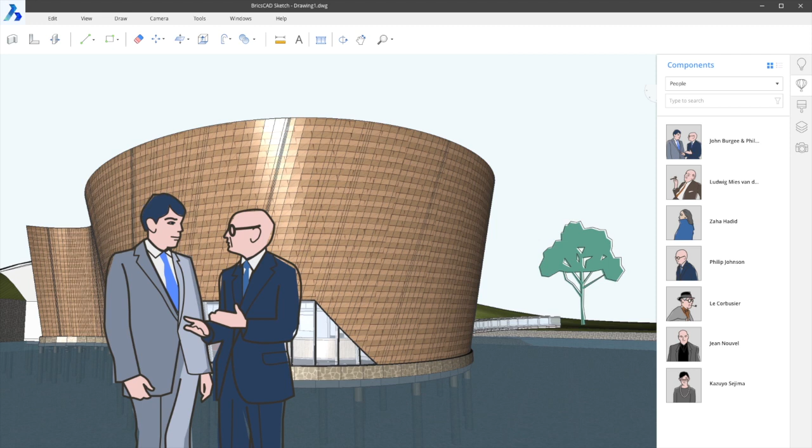But somebody before me, way more famous than I am, always ended these presentations with, there's just one more thing. And, well, we have just one more thing. I'm really, really happy to announce a new product that we're going to launch.

Our point is that we have to address the need of starting simple. I heard Michael Nordval saying that in architecture, it's really about the architecture first. And what you need is really simple tools, easy to use, to set up that conceptual design. I mean, play with it. It must be fun to do. I said it this morning already, if you have to be a specialist on the software, that's wrong. The software should be that easy that you can stay an architect or an engineer. And we think we have that initial product to fulfill that wish, that requirement.

And we call it Shape. BricsCAD Shape, you can call it Shape, whatever. It is about the GUI where nothing is missing, but as important, nothing too much as well. It's really made modeling simple, intuitive, from the point of view of managing your layers. I mean, you can read all these things. That is what it's all about. Make it easy, make it very, very intuitive, in a user-friendly interface.

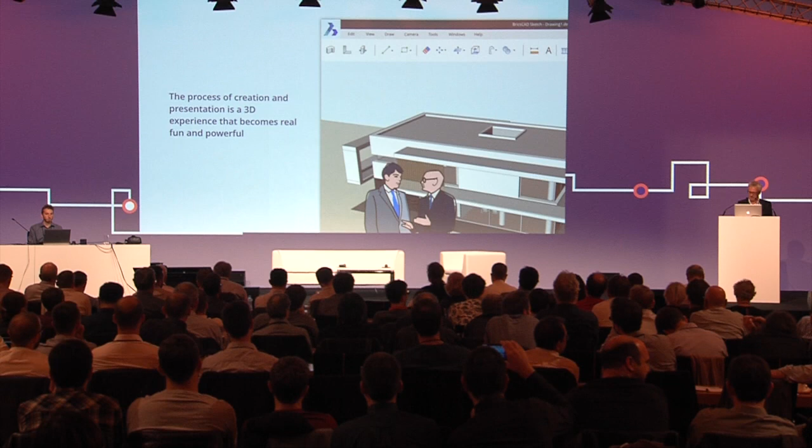So it's 100% DWG. It's 100% fitting in our philosophy. And the most thing probably for the market is that it's free of charge, and it doesn't require any training. So we're going to spread that massively in the industry.

And all models that you make with Shape, you just open it with the full BricsCAD BIM and you BIM. So I think we are bringing BIM to millions of AEC users in the DWG space. So that's the real start for them. They don't have to pay for it. They play with it. I'm almost sure that they're going to like it. And then we talk and see if they move on.

It will be available, I hope, end of 2017. But to be sure, absolutely sure, we have written down early 2018. But we can't wait to show it to you. So guys, show it.

Thanks, Eric. All right, we've been talking about future technologies, so as Eric mentioned, this is the near-term future of modeling. It's a very simplified interface and experience so that you have the tools, the features, everything at your fingertips so that you can explore your design ideas creatively.

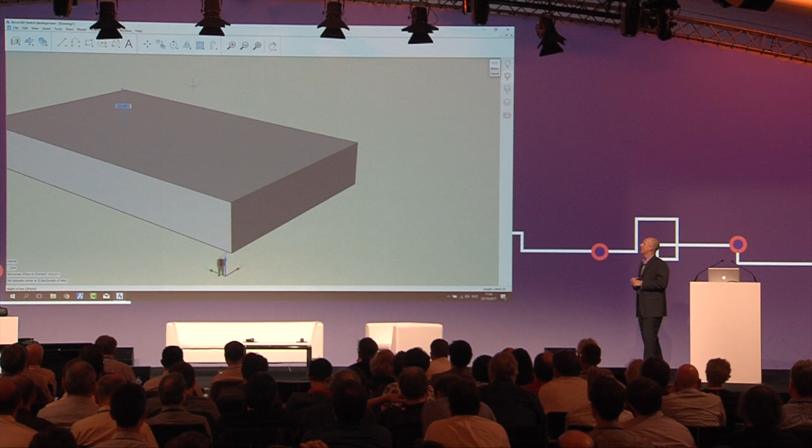So we can take this geometry and we can start to manipulate it and work with it. You saw the manipulator earlier, so we could take that, we could change the slope of that surface, say 10 degrees initially.

And if you remember, the whole concept was about folded screens. So we'll grab the surface on the back side, on the rear side of this building, we'll add a slope to that, and then we'll also do the same thing on the roof of it.

So within 3 moves, we're starting to shape the form. But as we look at the front, it's too steep, so we want to add some more slope to that. We can just grab it again. The manipulator's right there, and we can reset the angle to what we want.

All right, now we can grab that side boundary, and we can offset it to create a default depth for the roof, the walls, and the floor.

And so then using that boundary, we can push it through to hollow things out and create a shape there. And then what we can do to create the walls and the roof, we can use slice that we access from the quad. We can do that on the undersurface of the roof, and we can also do that on the top surface of the floor. And so then we've got the walls, the roof, and the floor.

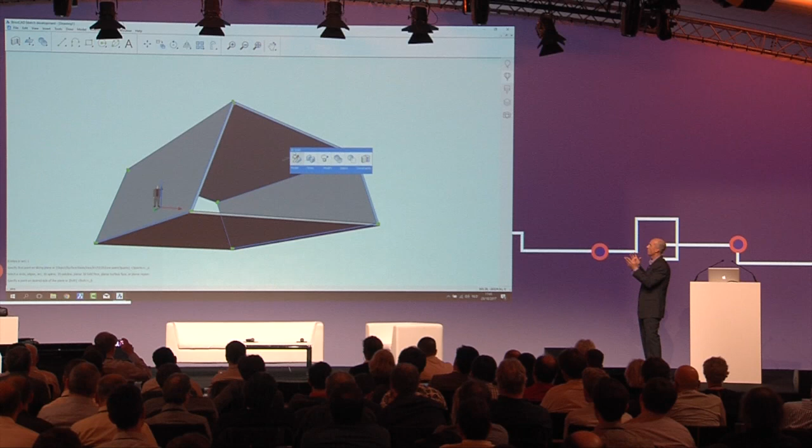And now, the whole tower design was about natural ventilation, but this is a little bit too much. So we'll look at adding some sidewalls here really quickly. We can grab the boundary of that, extrude it towards us, and create the wall.

And then we can just grab a surface of that wall, use BIM drag, and carry it across to the other side. So pretty quickly, we're starting to build things up, explore our design ideas.

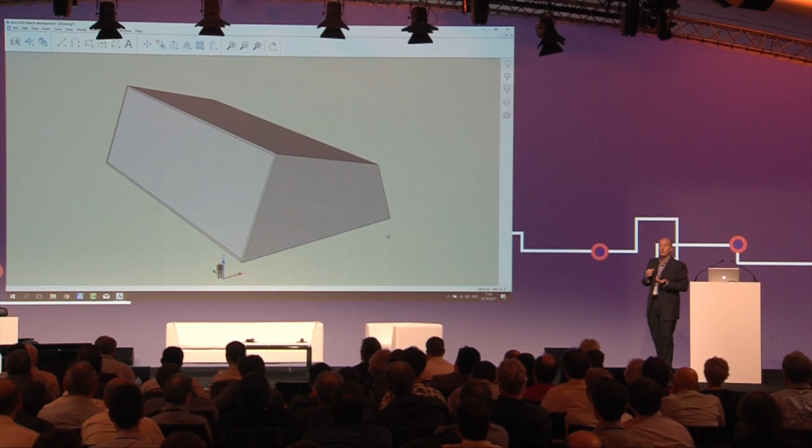We can then start to look at creating an opening for that entry into the yoga studio. So we could create just a shape rectangle here. And then we can grab that, and we can push it through not only the wall, but we can push it through the floor and the sloped wall as well to create that void.

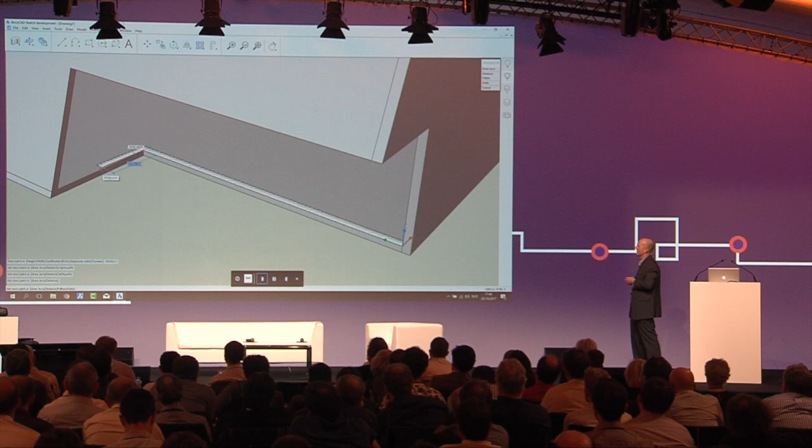And then we can zoom in a bit, and we can draw some polysolids to create an enclosure. We'll quickly place those, and we can select the undersurface to set the height.

Now, we didn't draw it all the way to the edge of the sloped wall because we can just highlight the surface, access connect to nearest, and then it'll connect it to that sloped wall.

Then we can grab the boundary that's created by the floor, and we can use that to drag it out to create the landing for the entry area.

So then we can hide the roof, and we can start to create a view looking inside.

Now let's create the second floor. And we can do that by using connect to shift the connection of the walls so we can get the surface that we want.

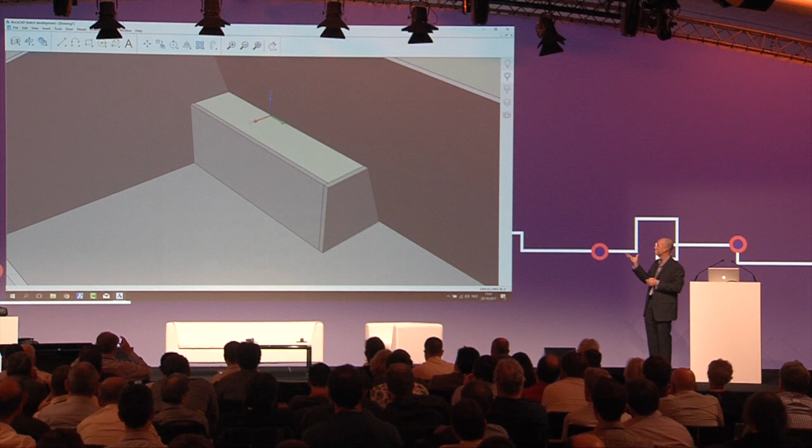I'll highlight that top surface, extrude it up to create the depth for a floor. And then we'll use push-pull to pull it out. And then we'll use connect to nearest.

That'll connect it to that sloped wall in the back. We can use connect to nearest on the other side to connect to the side, and again, to the front. So pretty quickly, we have this floor that's connected to these sloped walls.

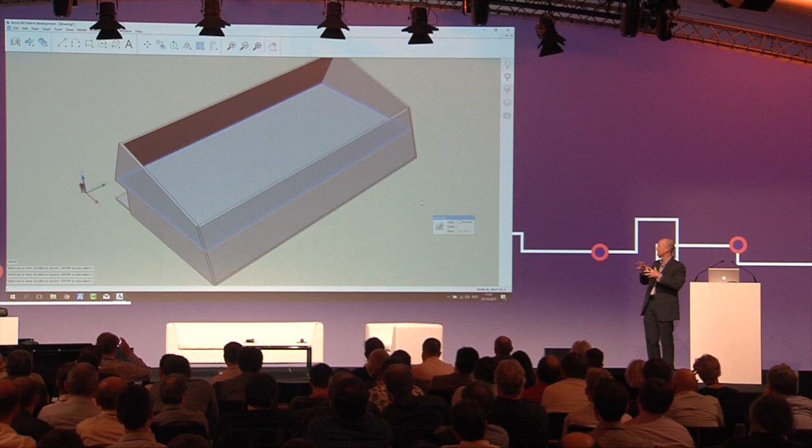Now we can unhide that, and we can hide the surface of this end wall. And it creates a boundary on the other end. So we can use that to grab that, use BIM drag, and then pull it to create an interior wall.

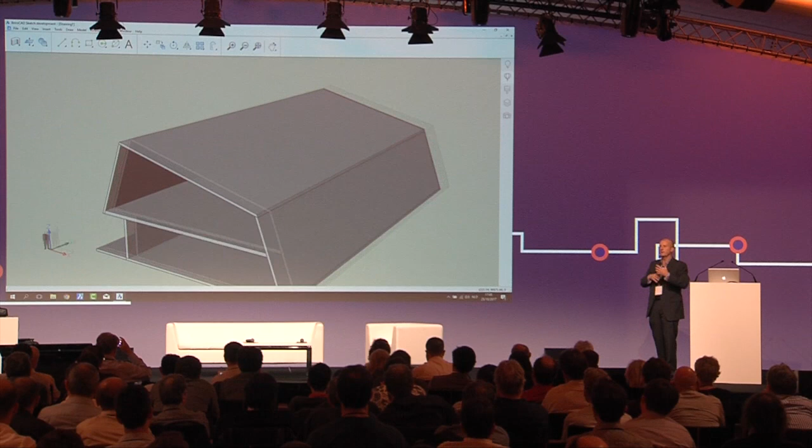As you start to use Shape more, you'll realize that you can use boundaries in lots and lots of interesting ways. So now we can get that boundary surface on the front wall and push it through to create a void opening for a rough space. And again, we're just trying to get some design ideas down.

And now we can start to create the exo structure that's a key part of this yoga studio. So we can select that boundary, select an offset, start to create that. Then we can take that polyline and we can push it out to create a surface.

That's the depth of the frame, the structural frame. And then we can highlight that overall surface, use thicken, and we can create the overall 3D structure element.

And then we can make a copy of that because this is actually a prefab assembly unit, and so we have two frames that are in close proximity that are connected to each other.

And now we can isolate these two structural frames, and we can start to create the secondary structure members that are spanning between those frames.

So we can get the surface to set the UCS that we want, and then we can draw a profile for a beam that we can push through and create an initial structural member.

Then we can grab that surface, use BIM drag, and start to make a copy of it, and then we can make a number of copies of it.

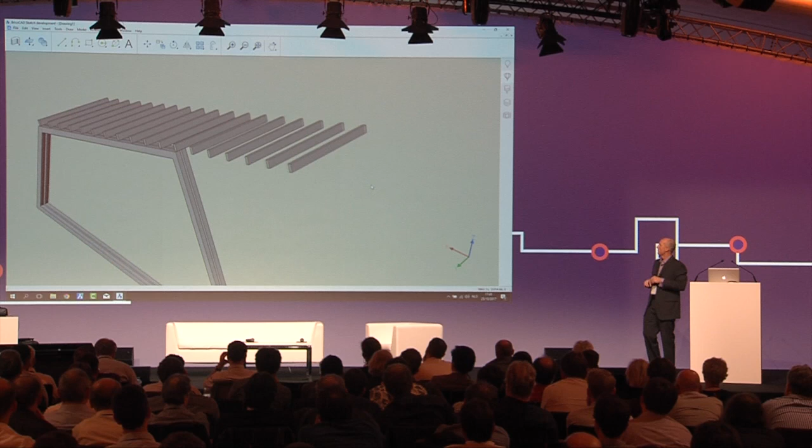Now, it may seem at the end of the day that Jacob's going a bit over the top here, but part of the design intent is that we're able to fold these members down to that structural frame. So again, we can use our friend the manipulator and set the angle for that and turn them down to the face of the structural member.

And we can do a similar approach on the back. We can create copies of those, bring them to the edge of that truss or that frame, and then we can grab those. And again, using the manipulator, we can turn them down.

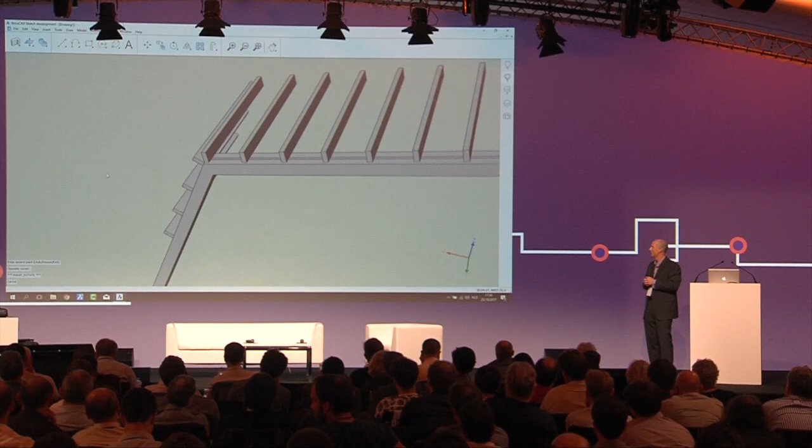And what we can do is we can create an intermediate member here by just grabbing that boundary that's created from between, you have the two beams and you have the boundary, so we could grab that, and then we can create a copy, and we can carry that forward across.

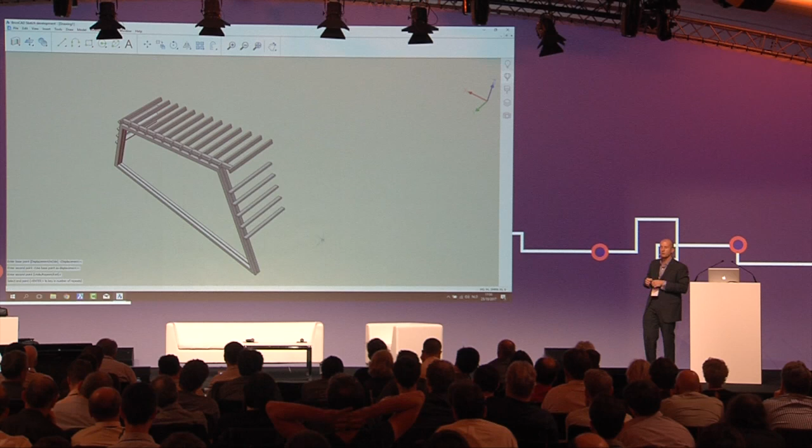And so we can actually have a structural member reaching out to that one that was just floating out in space.

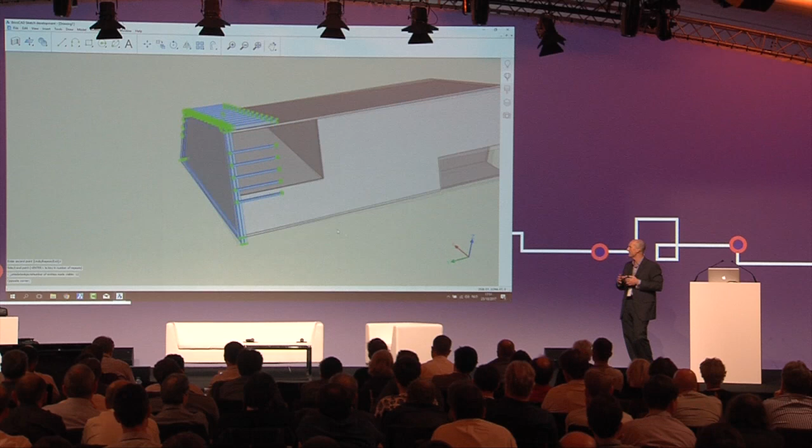And so now we've got the main structural members in that bay, in our structural module. So then we can grab that whole set, we can create a copy of it, and then repeat copy to go across the whole width of the yoga studio.

Now we need to finish off the two frames at the end, so we can just make a copy of those.

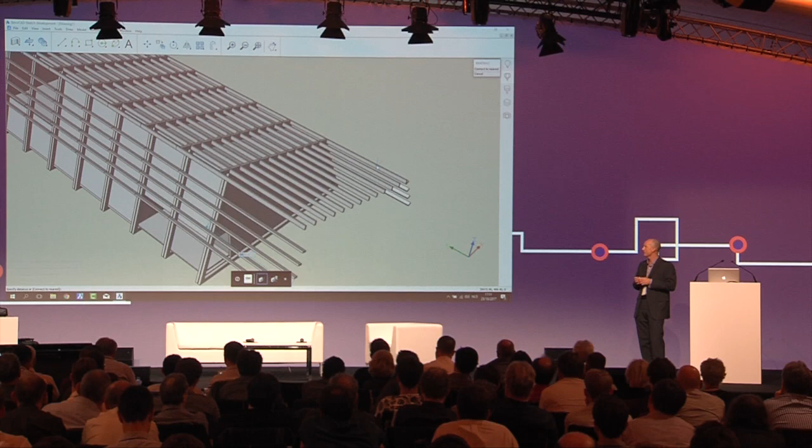And there we've got the initial rough form and the structure in place, but we've got a few things to clean up. So we can grab the surface of that beam, do a select all from the quad, and then move those using BIM drag to create an offset over that last frame.

And we can quickly do the same thing on the other side.

Are we having fun yet? I'll take that as a yes.

All right, and so now what we can do, since we've got the overall structure in place, we're going to look at doing the glass canopy, and we're going to create that from just a polyline.

So we can start at the lower, on the front facade, at the lower side, the outer face of that beam, we can carry that up, get to where we can wrap to the roof,

down the back side, and we can find that intermediate point between there, and then we can reach down to the back side, the lowest member. And so now we have a polyline, which then, similar to what we did before, we can create

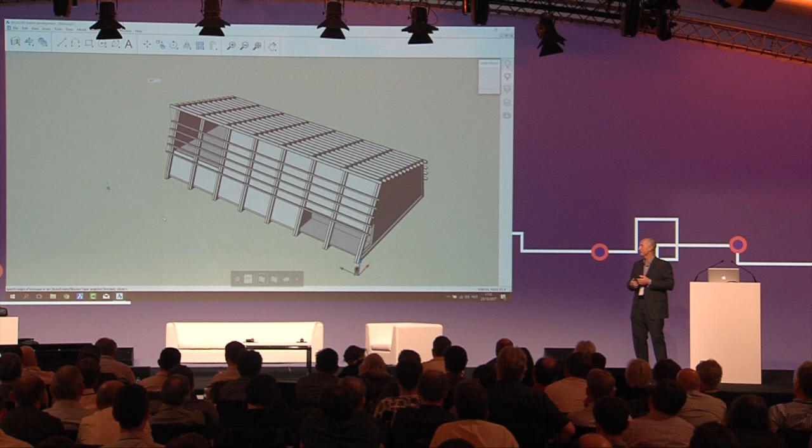a surface from that and carry it all the way across. And then we can thicken that to create the glass canopy.

So we've got the form in place now. Now let's step inside. We created a rough space with just creating an interior wall and pushing that opening out. What we'll do is we'll hide a couple members.

Now, one of the other key components in Shape is this components browser, where you have different categories of components that you can start to place.

So maybe we're considering this initial rough layout of a space to be a lounge for the people at the yoga studio, where they can hang out before and after classes, to where they can relax.

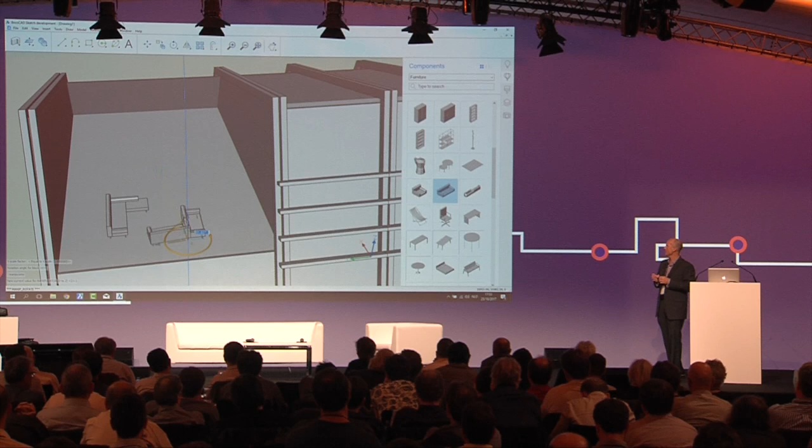So Jacob's setting the mood by introducing some couches, feeling comfy already. And maybe we introduce a table into that.

And this is a way to also check the size of the space that you're working with to see if it makes sense, if you need to make adjustments.

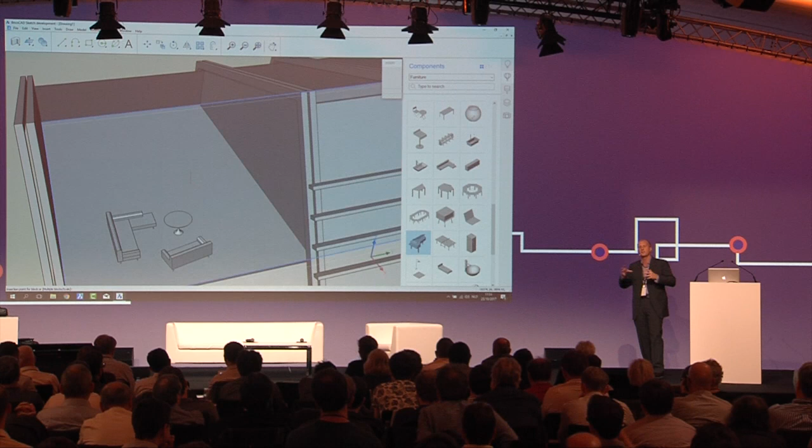Now, maybe those people, when they finish the yoga class, they want to play a baby grand piano, or they want to have somebody else play the baby grand piano so they can keep that Zen state of mind.

You have access to a lot of components right off the bat when Shape becomes available, but that content will only continue to grow.

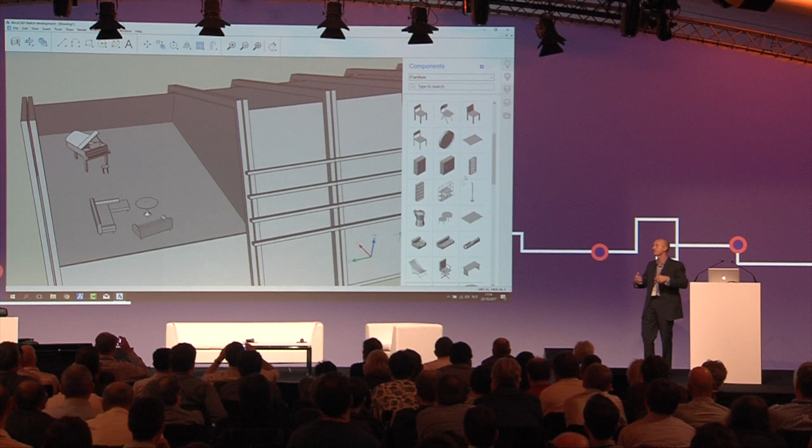Another thing you can do is access other different categories, so you have access to doors and windows. If we just wanted to look at creating some openings to connect to the adjoining spaces, we could. And again, you place it in the same way.

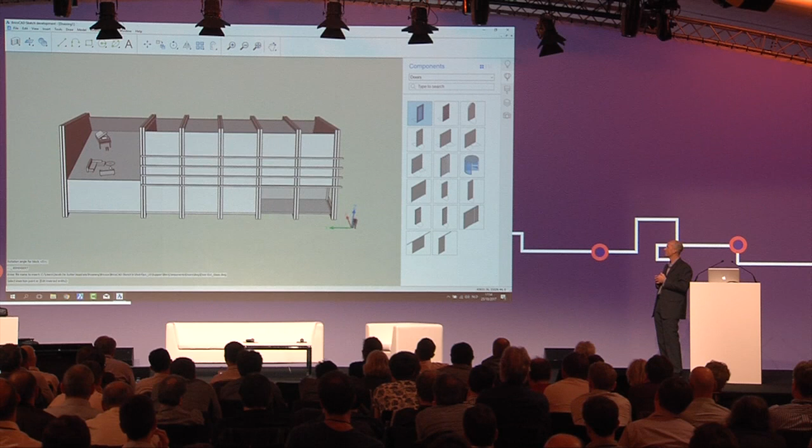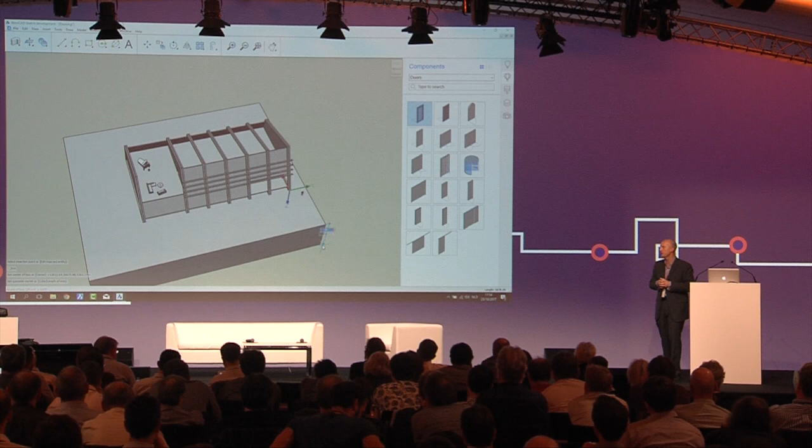So what we could start to do now is lay out the site. We could start by just defining a block for the overall site area. Jacob was just selecting the bottom surface of that and then using that to be able to draw. And then we could add one for the street.

Part of the yoga studio design idea that we're trying to pitch is that it's partly cantilevered over a water feature. So we could create an opening for that water feature, use that boundary, and then push it down to create the void.

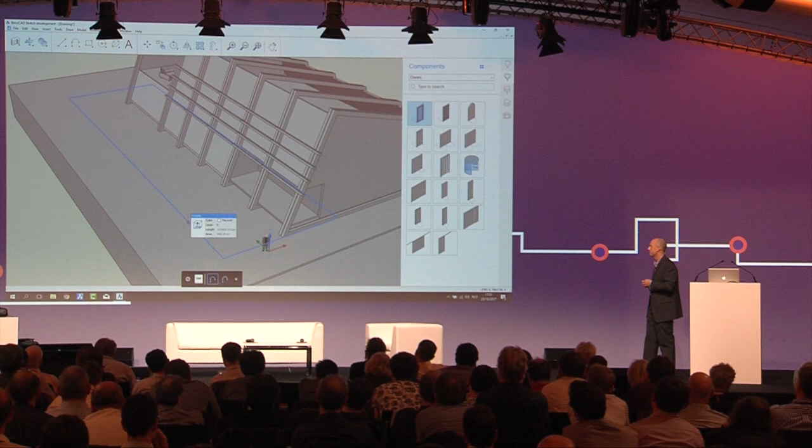So what we can then do is, again, keeping with the theme of being able to select boundaries, we can select the boundary, do an offset. If we want to set the depth for the water feature walls, we can, and then we can select in between those two boundaries and create another extrusion that we can go up to do the water feature walls, and then we can extrude that bottom to create the water feature element itself.

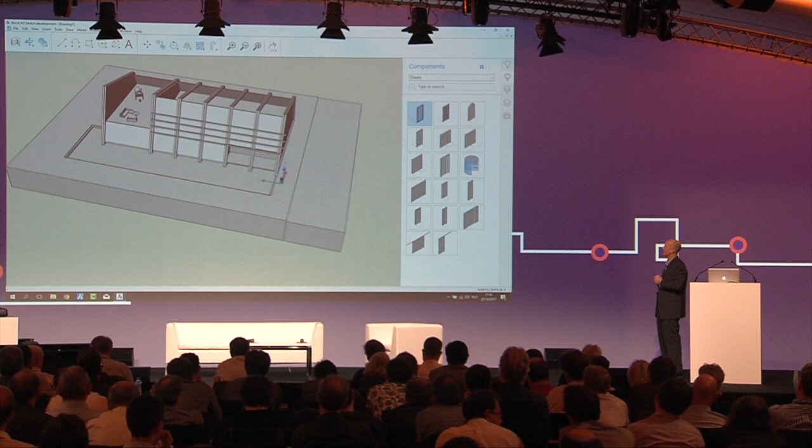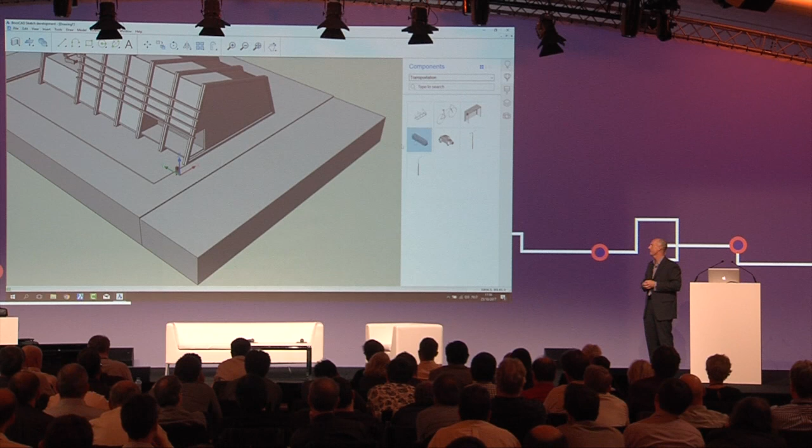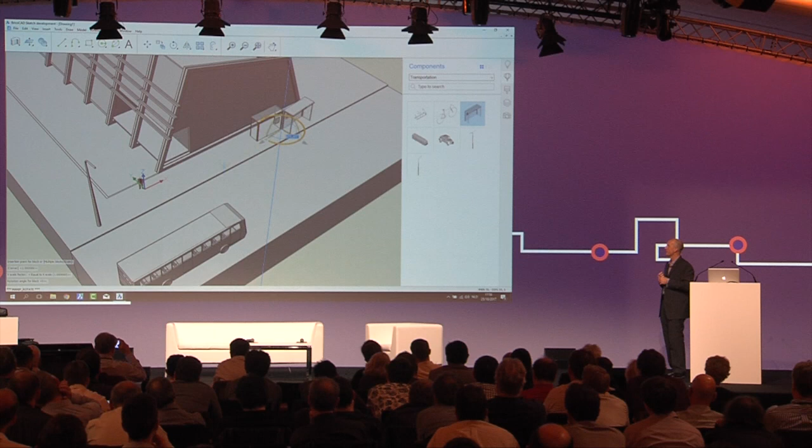Now, if we wanted to start to add some character to this, we can select other types of icons if we're starting to pitch the idea and try and sell it. Since we're in an urban setting, we can incorporate a bus, and we're probably going to need some lighting for the design at night. And where there are buses, there are typically bus shelters, so we can quickly select and include that. And keeping with the active lifestyle idea of the yoga studio, we could include a bicycle.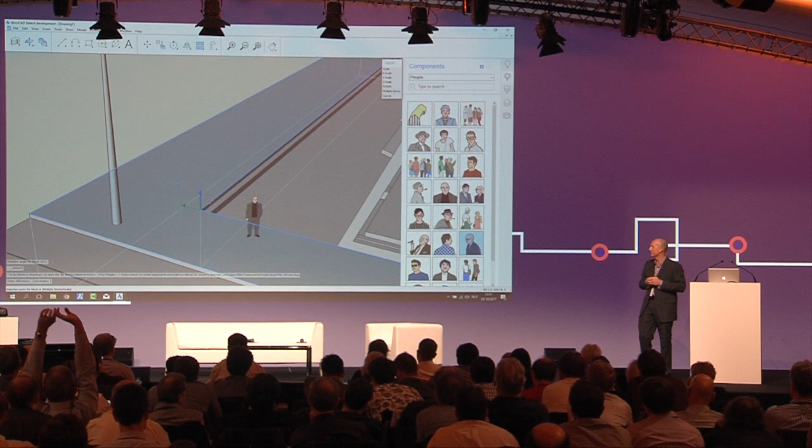But these things need some interesting characters. So we can select a category of people, and we can maybe introduce a group of people that are talking about how fabulous that yoga class was. Or if you want to sell a design idea, it's not a bad thing to have a famous architect. So if we introduce Philip Johnson into this model, then he could help sell the idea.

But now, Philip and I have one thing in common. We both don't have a lot of hair. So it would probably be useful to have some vegetation available so we could grab some trees and incorporate those into the model. So pretty quickly, we can build up the story around our design idea.

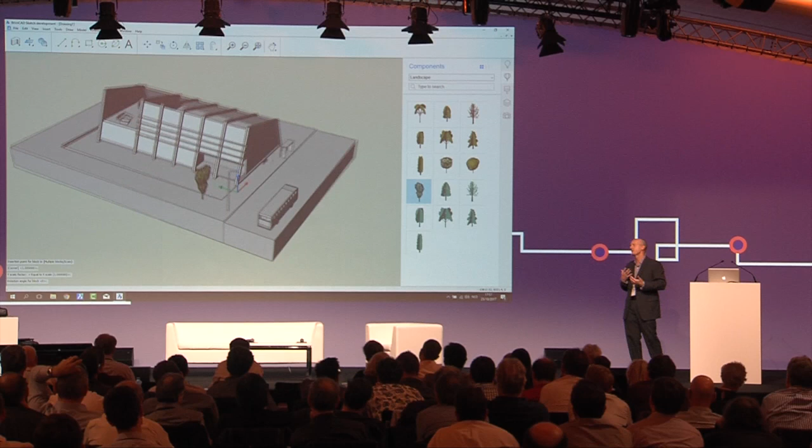Now, as we scan back to this and look at it, it's looking a bit monotone right now. So another option that we have is to add materials to this. So we could put grass on the site. We could do concrete on the roadway and maybe on the walls of the water feature if we wanted to.

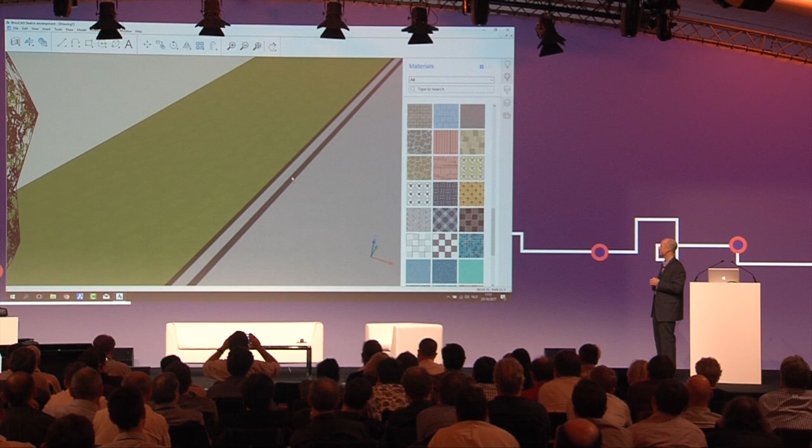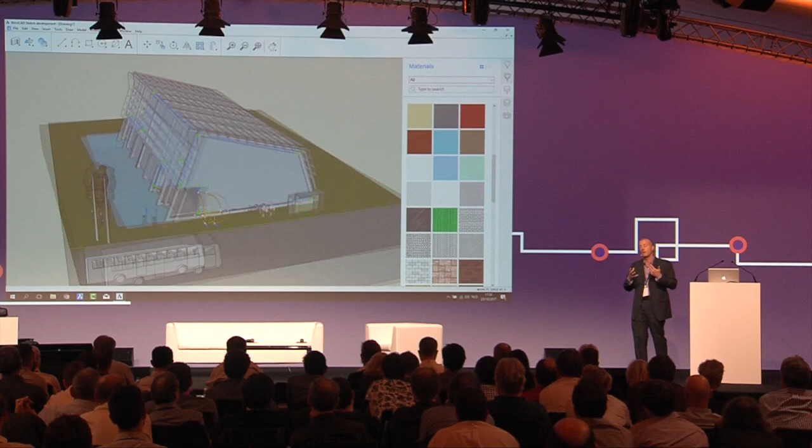We could add the water element material to create the water element. Then we could select some materials to put on, or we could create the glass canopy, putting glass material on the canopy, and then we could select multiple wall surfaces, exterior wall surfaces, the facades, and put a material on that just to create an idea.

Obviously, we haven't added the windows and other things to this, but just quickly putting the idea together. And then maybe we could select the frames, and we could add a material to that.

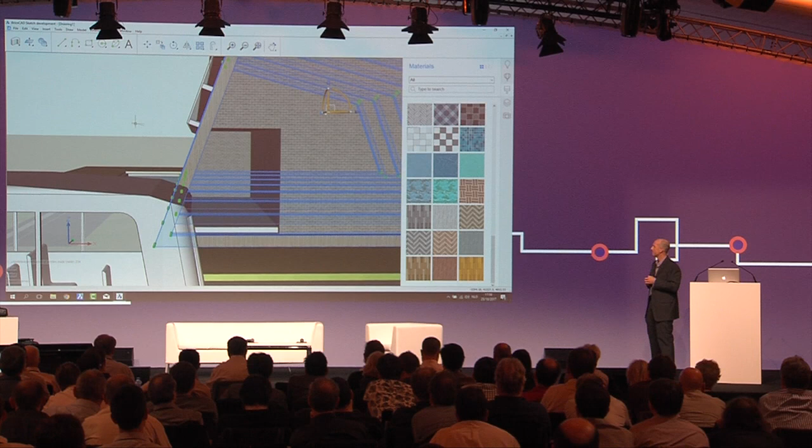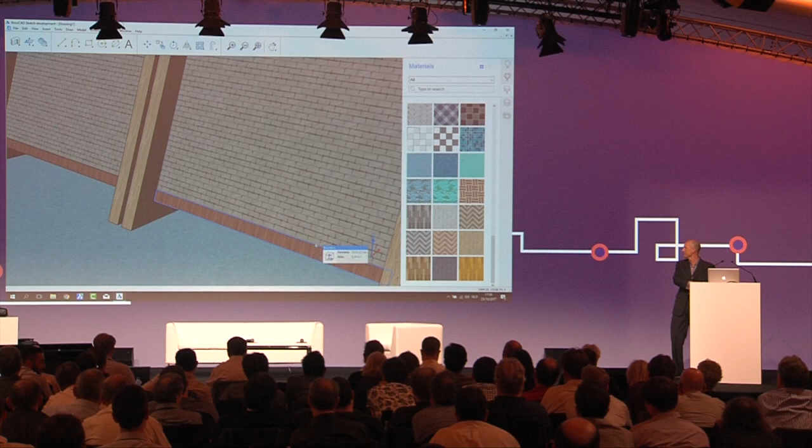And we could add redwood as a material to the landing, and Jacob's just getting creative now. But the idea is that we could keep going. We could keep adding to this, enriching the design idea, starting to tell the story.

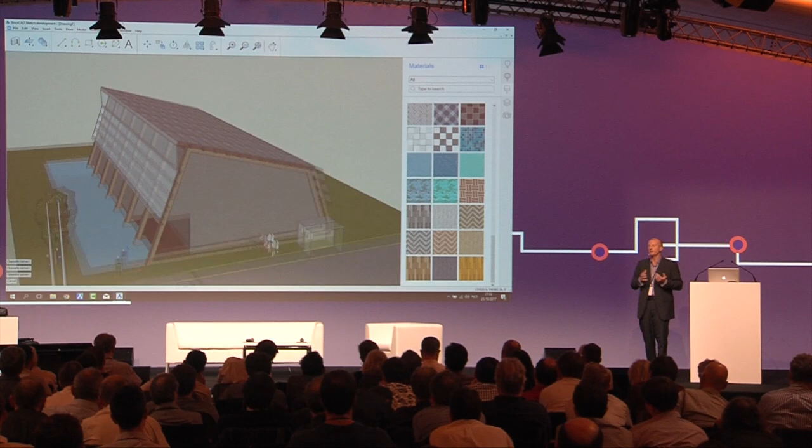And as Eric mentioned, once we finish this, we can end up bringing it into BricsCAD BIM, and you have access to all the features that you saw earlier and all the development efforts that are going into that.